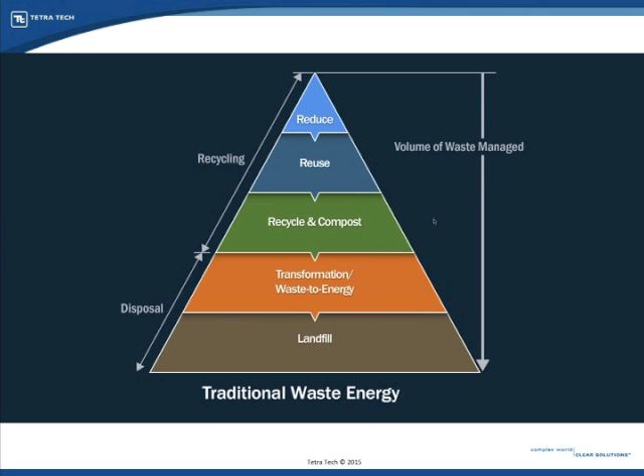But the next slide, and this is a bit of an animation, hopefully it'll come across, this has been flipped on its head, if you will, in terms of the industry. And the industry has changed and transformed in this paradigm shift over the last several years, and it could be varying degrees, a number of years, depending on who you speak to.

But the focus now has been to reduce the amount of material that goes into the landfill, still utilize as much as you can for that transformation, the waste to energy segment, but also convert it into compost and other usable materials. Certainly, we've seen a huge shift since the 70s on recycling, and most importantly, now we're focused on waste prevention and reduction of that. So these growth areas on the right-hand side require kind of a new thinking, if you will.

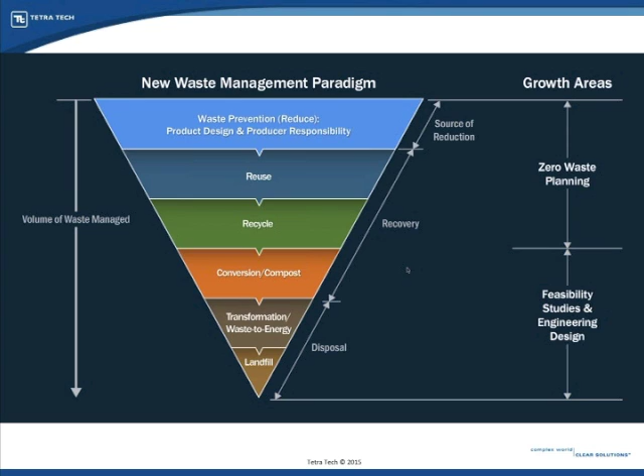It's no longer focused—or I should say the emphasis is shifting—from a traditional landfill mentality of how we receive, haul, store, and close these landfills. But now it's talking about things like zero waste planning and how that can be incorporated to minimize the materials that go to the landfill.

The following slide is a traditional diagram provided by EPA that shows a general distribution of materials from MSW. You can see the bottom right is the recyclable type materials—glass, metals, and plastics—that have pretty well-established programs throughout North America. But there's less so, and this is where the paradigm shift comes into play, in the top half of the pie: yard trimmings, food residuals, and paper and varying subsets of these, referred to as the organic portion of the MSW.

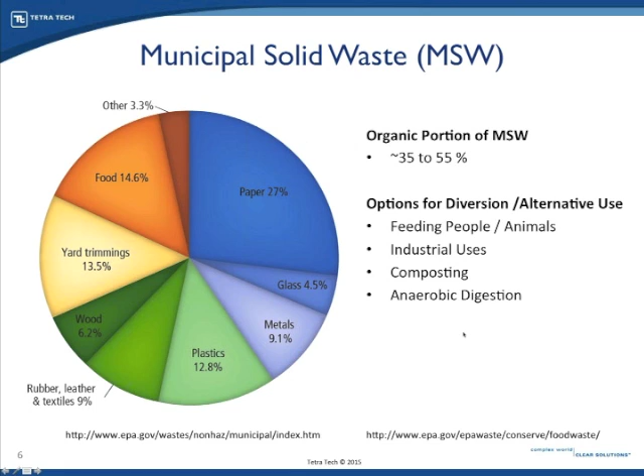This has been a transformation—a large change in terms of how we manage that material. These organics, one of the primary alternatives is utilizing food residuals, pre-consumer residuals to feed people, and post-consumer food waste to feed animals. There's nothing new there, but there's also a number of things in terms of industrial uses, generating byproducts and primary products. There's also composting that's been involved in the United States for decades, but anaerobic digestion is relatively new to the U.S. market, and I'll talk a little bit about that in subsequent slides.

So this waste material is being transformed in terms of utilizing it as a waste, but also, of course, oftentimes utilizing it as an organic material that can be alternatively used.

Now, what are the drivers behind this process? This next slide shows that a number of things have occurred. I'd say probably originally in California, these assembly bills—AB 32, 341, 1826, and 1594—just to name a few from California.

Those have probably started the process. I would say AB 32, the California Global Warming Solutions Act in 2006, talked about the reduction of landfill emissions. California, while certainly a very large economic and socio-political driver sometimes for the entire country, is often where these regulations start. So not only in the United States, but sometimes it evolves into other parts of North America, certainly our friends in Canada.

So the numerous regulations started in the late 2000s, and more recently in March 2014, the White House came up with a climate action plan to create a strategy to reduce methane emissions, which would include a number of entities, including landfills.

And then in Vermont, Act 148, the Universal Recycling and Composting Act was taken care of. And Connecticut in 2013, Public Act 13-285, all of which focused on diversion of organics away from landfills and to utilize that as an alternative waste.

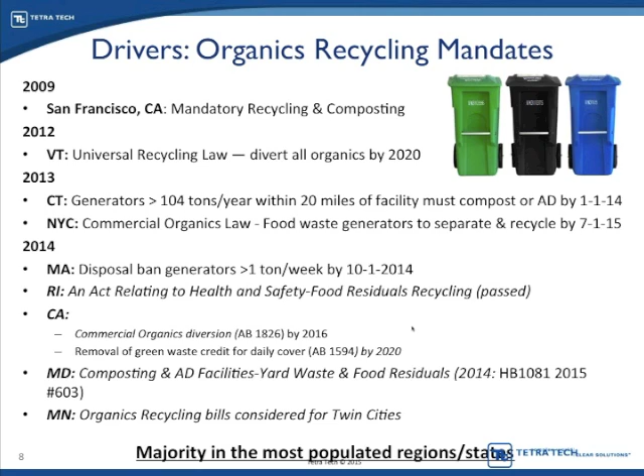I think you'll see that population density is certainly a factor here, but it's not the only factor. There's a number of things such as good stewardship and other benefits to handling this waste in an alternative means. In the central part of the country, there's less regulation per se, but you're seeing a lot of corporate sustainability plans being implemented.

You're seeing some of those plans, including Fortune 100 and Fortune 500 companies, that are looking at how they can handle this waste differently. So this would not only be driven by regulatory factors as I've described in the last several slides, but also by corporate sustainability programs.

For example, large corporations like Walmart and Target that have a number of waste byproducts through their stores and operations are handling this material in a different way. Large food and beverage manufacturers, instead of disposing to a landfill or taking it to a wastewater treatment plant for discharge, are looking at managing this material differently.

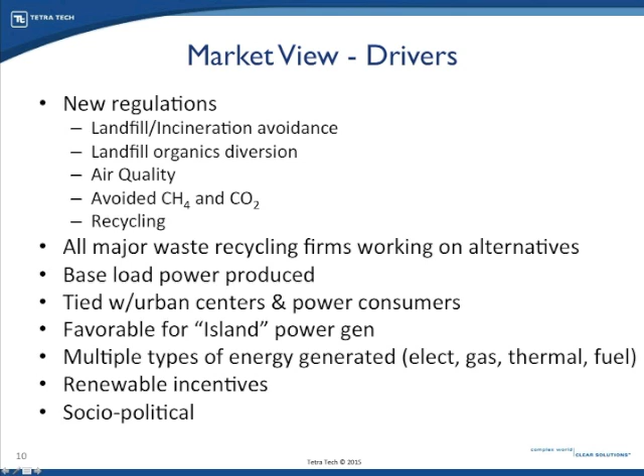So let's move on to the next slide, which describes a little bit about what bioenergy and waste energy is.

I've mentioned anaerobic digestion, but let's talk about the feedstocks or material utilized through that process. In Tetra Tech's view, we look at the conversion of all things organic into an alternative byproduct, into that bioenergy or waste energy sector. This includes both biological and thermochemical conversion—biological predominantly being anaerobic digestion, and thermochemical being things such as gasification or pyrolysis. Feedstocks include municipal solid waste, with a focus on the organic fraction of that.

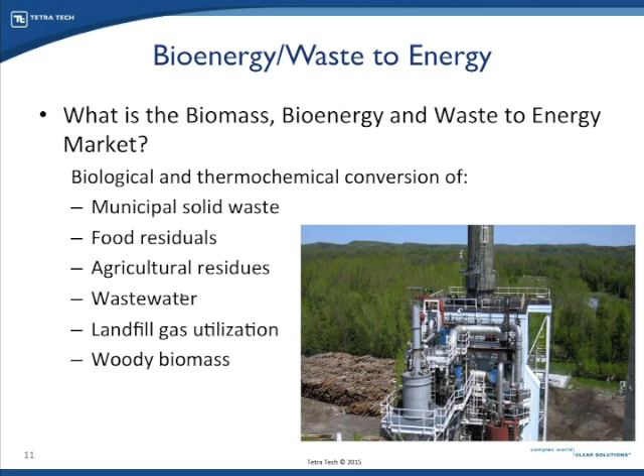Food residuals can be pre-consumer, byproducts from a manufacturing process, or post-consumer, source-separated materials at the user's location, distributed and utilized differently, received from a transfer station or a material recycling facility, a MRF. It can also be agricultural residues such as livestock manures, or byproducts from the growing and cropping industry. It can also be wastewater from human waste, and landfill gas—material decomposed in the landfill that can be converted to energy. And of course woody materials, as seen here on a biomass plant in the state of Vermont.

Let's move on to the next slide and talk about this evolution. I mentioned earlier that incineration, from a United States perspective, has predominantly been the source of waste energy. As you'll notice from this slide, the geographic locations are similar to the higher populous states, but also notice the timeframe from which these plants have been installed and operating.

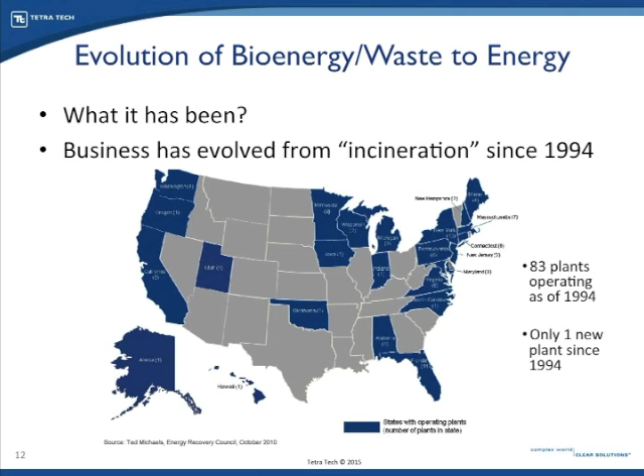As cited from the Energy Recovery Council, there were 83 plants in operation as of 1994, but only one plant, in the state of Florida, has been installed in the years since. So there's been relatively no drivers and no additional plants focused on incineration technology. This concept of bioenergy and waste energy has evolved from straight incineration to other alternatives—I'm going to talk about anaerobic digestion, and briefly mention more about thermochemical conversions.

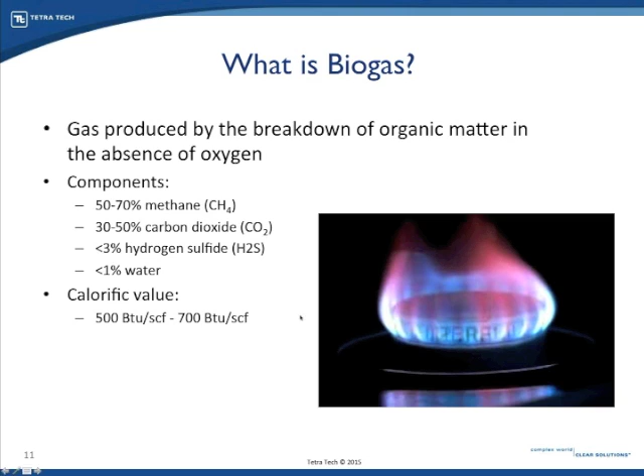The components of that breakdown generate roughly 50 to 70% methane, with the balance being carbon dioxide, a small percentage of hydrogen sulfide, and water. This gives a calorific value of roughly 500 to 700 BTUs per standard cubic foot. But this is the raw biogas, and often that biogas is cleaned or purified, further concentrated so you have a higher BTU content.

The next slide shows a graphic put together by a combination of entities, including the USDA, the EPA, and the American Biogas Council. This graphic, developed with input from both laymen and technical folks in the industry, shows the process of a bioenergy and anaerobic digestion plant, optimizing the utilization of organic material from the left-hand side of the screen, where that material is delivered—manures, agriculture materials, or food waste, both pre- and post-consumer.

That material is transformed in an anaerobic digester. This can be a continuous stir tank reactor or a complete mix system. It can also be in a lagoon setting, as well as other technologies such as plug flow. Those are generally referred to as wet digestion, but there's also the ability to transform this via dry digestion, and I'll illustrate a couple examples of that moving forward.

This biogas can then be converted over to water, carbon dioxide, and methane, as I mentioned, but the solids and liquids can be transformed into fertilizing material. It can be utilized in a number of other byproducts. The raw biogas can then be converted into electricity, thermal, and of course compressed natural gas, renewable natural gas vehicle fuel.

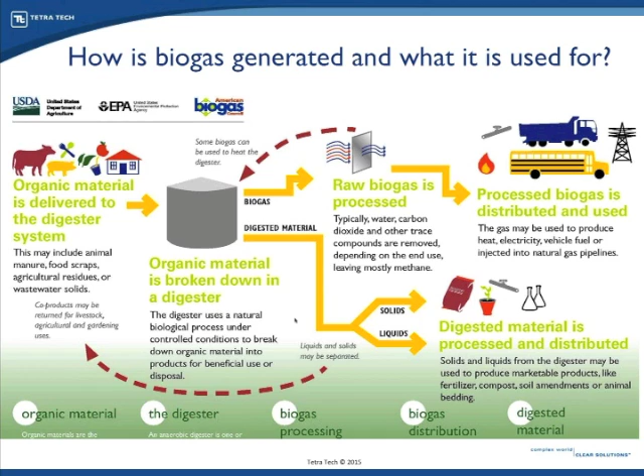So let's move on to the next slide, where we'll talk a little bit about the market challenges. I think the competitors in the energy sector are quite numerous. Fossil fuels are a strong competitor to the bioenergy market space, but frankly, anaerobic digestion, or specifically the bioenergy market, may have different ways to address this challenge.

The challenge being relatively low natural gas prices, with shale gas being abundant and frankly a glut of that material. But as I pointed out, the anaerobic digestion and bioenergy sector is not simply about energy. It's about waste diversion and managing waste in a more meaningful and sustainable manner.

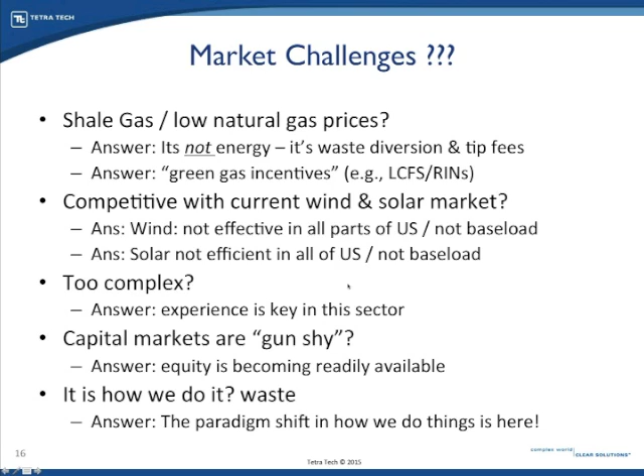Lastly, there's this mindset: we've always done it this way. We've taken our materials, done some recycling to be sustainable, but put this waste in landfills. But as I've pointed out with the regulatory drivers, there's a paradigm shift in place that allows us to do things differently going forward.

This location is the Zero Waste Energy Development Corporation and Zero Waste Energy Technology, focused on a German technology, the compost gas technology. In this circumstance, this is a 90,000 tons per year processing facility located in San Jose, California.

The materials are received on the back left, and they are processed - there's a small MRF inside the building on the left. In the center portion of this facility, they have what's considered a high solids anaerobic digestion facility, where the material is taken in and put into concrete modules, or garage doors to simplify it.

The doors are closed. The material is transformed into an anaerobic state where it is further decomposed. The material is then taken out of those modules or garage doors, in the simplest sense, and taken off-site beyond the screen here for further composting.

The graphic on the right-hand side illustrates the biofilters. Material with relatively high odor coming from the digester is managed through the biofilter to mitigate those odor challenges. The two pillow-top materials in the center of the screen are where the biogas is collected and stored, and in the back of the photograph is where the combined heat and power, or genset, is located, where that biogas was transformed into electricity.

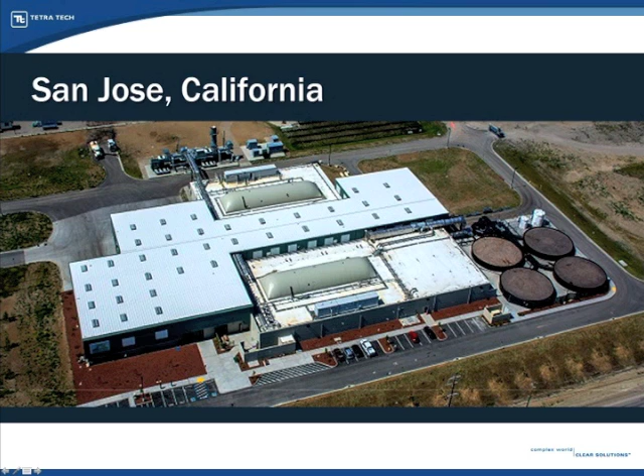Let me go on to the next example on slide 19. This is a project I've covered two of in California. Now I'll cover one in the state of Connecticut, being developed by a company called Turning Earth LLC, which is focused on similar high solids anaerobic digestion technology.

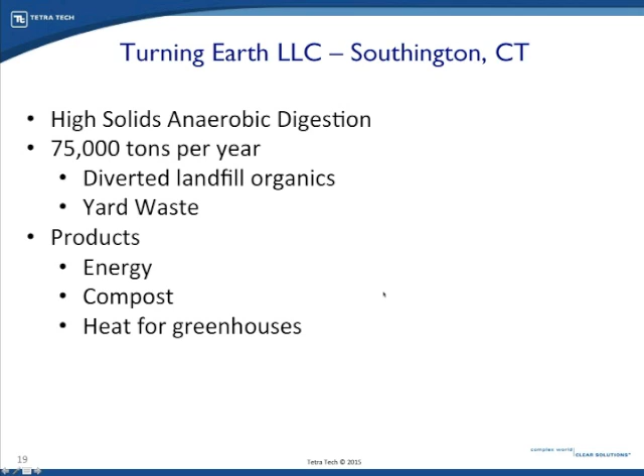So the material is only moved once in this circumstance: it's loaded into the module, goes through an anaerobic process followed by an aerobic process, and then the material is taken out and further composted, referred to as a maturization process. Let's move on to the next slide. Slide 21 illustrates the process steps for this facility in central Connecticut.

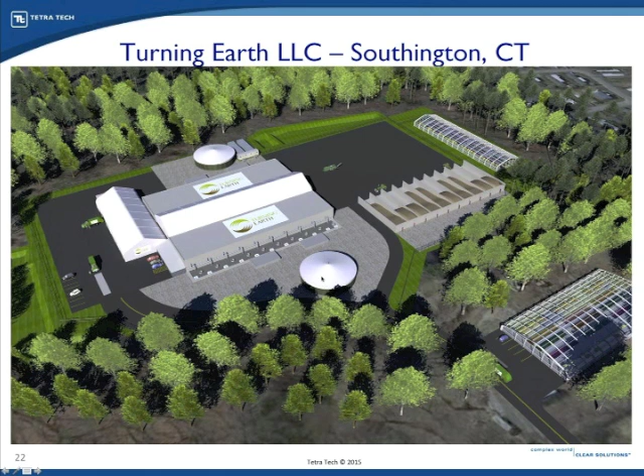What you also see in this graphic is an illustration of greenhouses that will be located both to the top right side and the bottom right side of the page, where compost materials will be taken over and used as substrate for growing organic vegetables. The waste heat from the combined heat and power on the top center would be transferred over and utilized for growing those vegetables. That waste heat won't be needed in one or two seasons out of the year, but in the winter months we'll have full growing year inside each of these greenhouses.

So let's move on to slide 23.

Wastewater treatment plants are something I mentioned earlier. A wastewater treatment plant is essential in every community as we're dealing with solid waste - in this case, human solid waste that is pumped to the centralized facility. It's certainly also a value in the agricultural setting as well, so these are really important pieces of our infrastructure in each of our communities.

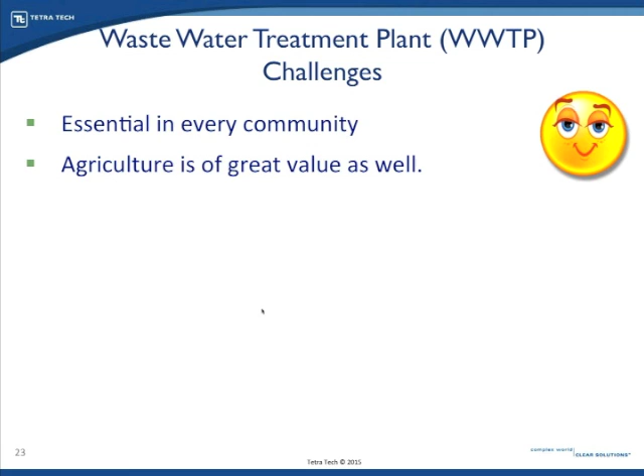But the problem with these wastewater treatment plants is they generally consume a lot of energy. In some cases where anaerobic digestion is utilized, biogas is often either underutilized or flared into the atmosphere. If it's flared, that mitigates greenhouse gas emissions since the methane is being flared, so it doesn't provide challenges in that regard. But this is a wasted resource, and it can be converted over to combined heat and power or renewable natural gas, as I mentioned in the previous examples.

So the question is: how can we transform this liability into an asset? These plants located in every community that have anaerobic digestion - how can we convert that into a viable resource, and how do we optimize the biogas generated for beneficial use?

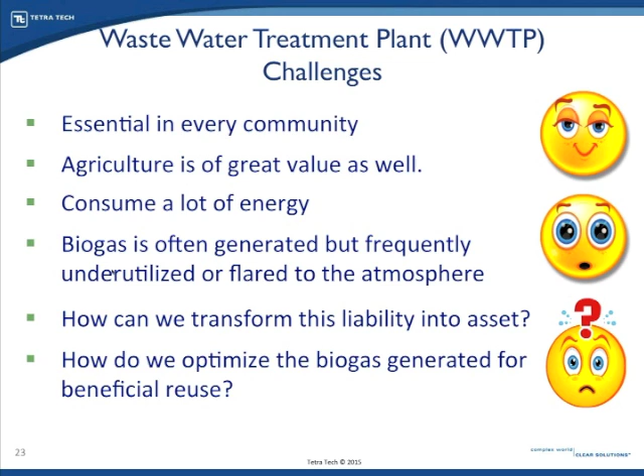The challenge at bay here is that most wastewater treatment plants are utilizing just the human solids that are transformed and transported to the facility via pumping and piping. But these facilities, as illustrated in many locations across the country, can be utilized to take food residuals and other materials and transport them further, using existing infrastructure to generate more biogas, which can be beneficially reused locally, either in the wastewater treatment plant or surrounding community.

So let's show an example on the next slide. This is in the city of Portland - a project we've done a number of years back. This is the Columbia Boulevard facility, which is one of the larger wastewater treatment plants.

You can see in this circumstance a Jenbacher engine that was operating, and they have an excess amount of biogas generated as the plants have come online and there have been modifications, but that biogas is not currently being utilized. So the study we went through, which I believe is almost in the implementation phases now, was to look at what to do with that additional biogas.

That additional biogas could be utilized either in a genset, doubling the power from 700 kW to 1.4 megawatts or 1400 kW engine cogeneration, shown in red, or it could all go to renewable compressed natural gas, or a combination of both, illustrated in the green line.

There are good similarities between utilizing all that biogas in the genset, an additional genset, or taking some of that biogas and converting it into compressed natural gas vehicle fuel that could be utilized for the fleet. As of about 3 months ago, they were still in the process of evaluating and implementing the compressed natural gas alternative.

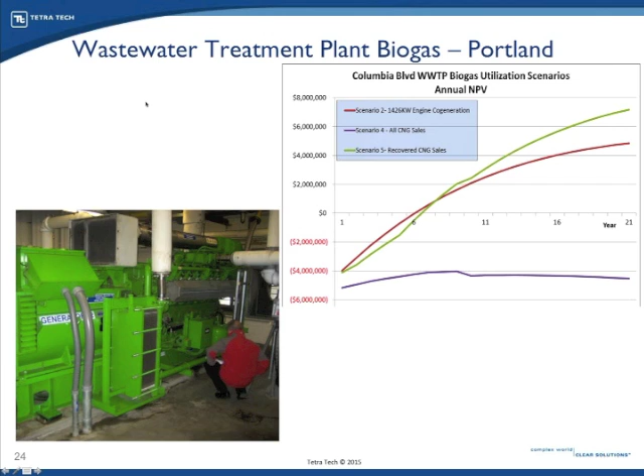Let's talk a little bit about that on the next slide. This is an illustration that could easily be utilized for compressed natural gas from fossil fuel-based natural gas, but the added value is that renewable compressed natural gas can be generated both at the source or very close to the source where it's utilized.

The photograph in the top right shows a waste management vehicle being fueled at a landfill gas facility, where the landfill gas is cleaned, purified, and upgraded, then transformed and utilized in transfer trucks or trash trucks. It can also be utilized, as illustrated in the bottom right, for municipal vehicles or bus fleets. It's most economical in these captive or owned fleets and infrastructure, but this can be an added advantage to others, such as wastewater treatment plants and other locations, as I pointed out in the last slide.

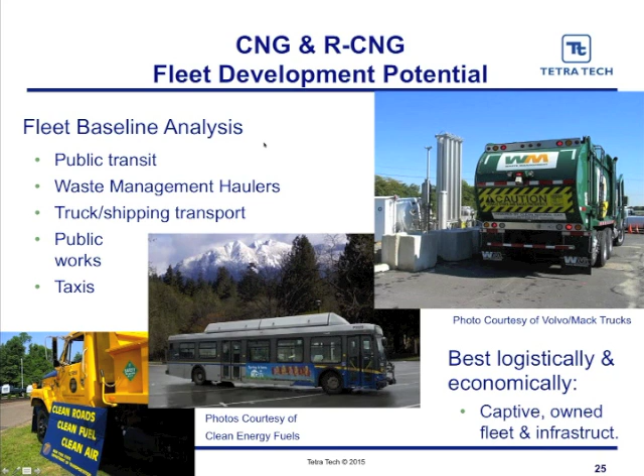Let's move to a more regional slide here now. The audience here, with the RMC, is focused on Pennsylvania, so I decided to throw this slide in, as it's my home state. Pennsylvania is one of the top 5 states in the country that has anaerobic digesters in operation. There are approximately 30 digesters operating on Pennsylvania farms currently, and while I don't know the exact number of farms utilizing organic co-substrates or food residuals, I think roughly 20 to 40% of those farms are utilizing outside substrate or food substrates in combination with livestock manure.

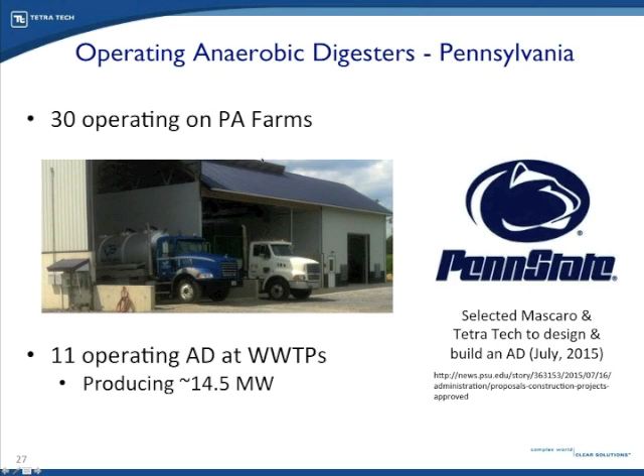I also want to point out that wastewater treatment plants, about 11 operating in the state, are generating about 14.5 megawatts of power. We were just recently selected by Penn State University to implement an on-farm, on-campus anaerobic digestion facility to convert livestock manure from multiple animal types on campus to be utilized at the facility.

Moving on to the next slide quickly - although the focus of the presentation is not on thermochemical processes, there are certainly a number of advanced technologies focused on gasification and pyrolysis, utilizing those materials to generate syngas, as well as converting that syngas to other beneficial uses. Liquid fuels and oils are advantageous as a primary product of thermochemical conversion, as is thermal heat and combined heat and power, as with the previous examples, which can be generated from these conversion technologies.

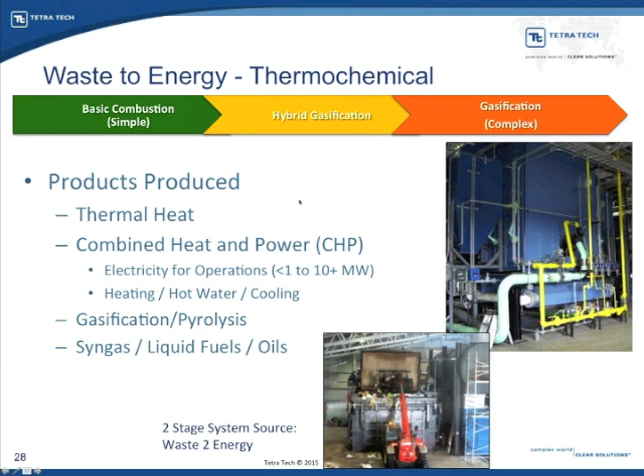So let's talk a little bit about future drivers here in the last segment of the presentation. And the future drivers really come in many types, but I'm going to hit on two particular types.

The Biogas Opportunities Roadmap was generated by the U.S. EPA, the USDA, and in partnership with the Department of Energy in August 2014. The biogas industry is well proven and well documented. There are over 8,000 digesters in Germany and Austria, 50,000 in Nepal, and millions of smaller-scale digesters in China. But there are relatively few biogas systems on farms in the U.S.

But research suggests, as documented in this roadmap, that there are an additional 8,000 livestock operations that are candidates to support biogas projects, in addition to the already existing 239 AD facilities on farms across the country. If its full potential in the United States for on-farm digesters alone were realized, the cost-effective biogas industry could produce enough energy from the livestock sector alone to power over 1 million average American homes. So it's important to point out the magnitude of the opportunity for utilization of anaerobic digesters, both for organics from municipal solid waste and on-farm organics.

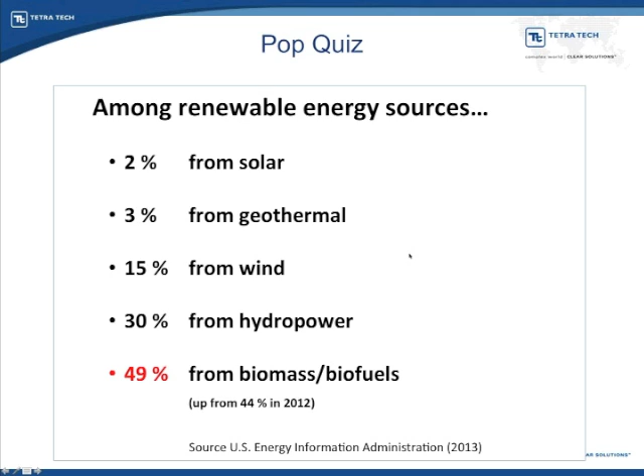The next slide will illustrate that, frankly, a large percentage, maybe it might surprise you, that 49% of renewable fuels and energy come from biomass. So if we advance to the last slide, here you can see the slice of the pie from renewable energy, and of that 9% from 2012, 49% is generated from biomass, whether it be biomass waste, biofuels, or wood-based biomass and waste energy projects.

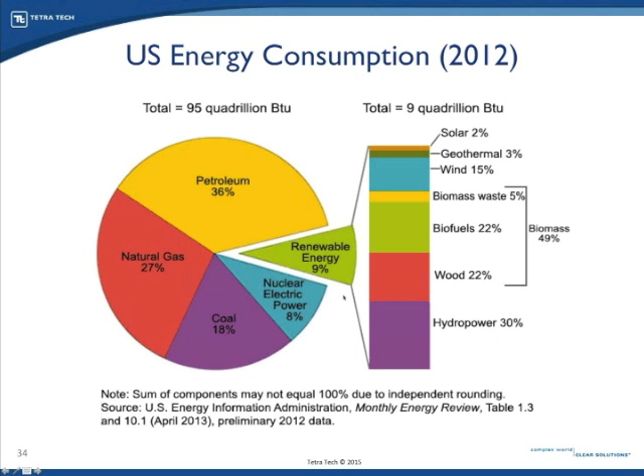And lastly, on the next slide, I'll share with you a nice little cartoon that perhaps 5, maybe 10, 15 years from now, although landfills will probably never go away, our current and future generation will look at landfills perhaps in another light, as we transform and continue with this paradigm shift in terms of how to manage organics in the current environment. With that, I thank you very much for your time.

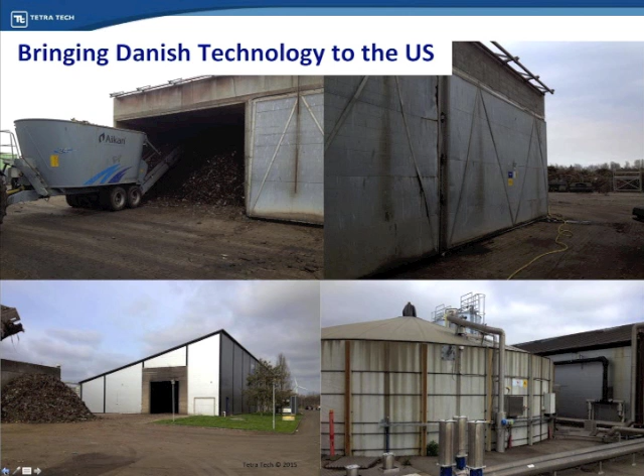In this circumstance, materials can be separated from organics, from recyclables, from trash materials, and otherwise where those materials are split in different locations. There are a number of technologies out there, both U.S. technologies as well as technologies from abroad, where those materials can be easily transformed through a MRF, or as well as other things such as transfer stations. These can be implemented in a very efficient manner so that each subset of the materials can be taken off and taken in different locations.

Another question: after anaerobic digestion, are soil nutrients, such as phosphorus in particular, still available for use in agriculture and fertilization, or are they permanently lost in the process?

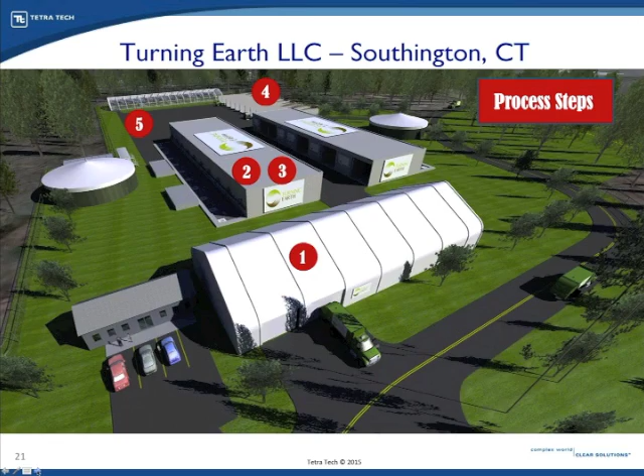That's an excellent question. That's one of the clear advantages of anaerobic digestion over other technologies, and this is being strongly considered in certain places such as the Chesapeake Bay in terms of its implementation. The short answer is they're not lost. They're transformed or mineralized, whereas phosphorus and nitrogen are transformed and end up in a more pure state, so they can be removed more effectively. They're not lost—there's essentially a net zero on those nutrients as it goes through the digestion process. But because they're mineralized, they can be utilized better. Both ammonia and phosphate or phosphorus can be removed through subsequent processes after the digester.

The reason I bring this up is in terms of nutrient-strapped locations such as the Chesapeake Bay—a number of states, including Pennsylvania, Maryland, Delaware and others, and other watersheds, are looking to minimize the discharge of those nutrients. Anaerobic digestion can be very helpful here. Both on farm and in the wastewater treatment plant, the combination of an anaerobic digestion system with nutrient removal is a very good technology suite that can be utilized effectively. So that's another illustration that in addition to the energy focus, the landfill diversion, the sustainability, and the baseload power, nutrient and water quality management can be enhanced by utilization of anaerobic digestion. These are advantages over traditional composting, where that's not able to be done in those circumstances, or can be, but with more complex steps.